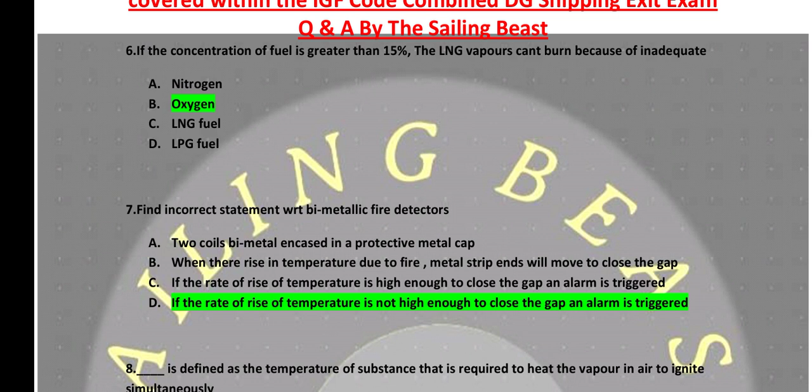Question number 5, what does the sound of an alarm signify to watchkeepers? The correct answer is D, pre-warning of abnormality. Question number 6, if the concentration of fuel is greater than 15%, the LNG vapors cannot burn because of inadequate... Answer is B, oxygen. Question number 7, find incorrect statement with respect to bimetallic fire detectors. Correct answer is D. I will repeat again: if the rate of rise of temperature is not high enough to close the gap, an alarm is triggered.

Question number 8, dash is defined as the temperature of substance that is required to heat the vapor in air to ignite simultaneously. So correct answer is C, auto ignition temperature. Question number 9, the system should have capacity to cover the indicated area with at least dash on horizontal surface and dash on vertical surface. So here the coverage area is asked, and answer is 10 liter per meter square per minute and 4 liter per meter square per minute. So 10 liter is for horizontal surface and 4 liter per meter square per minute is for vertical surface.

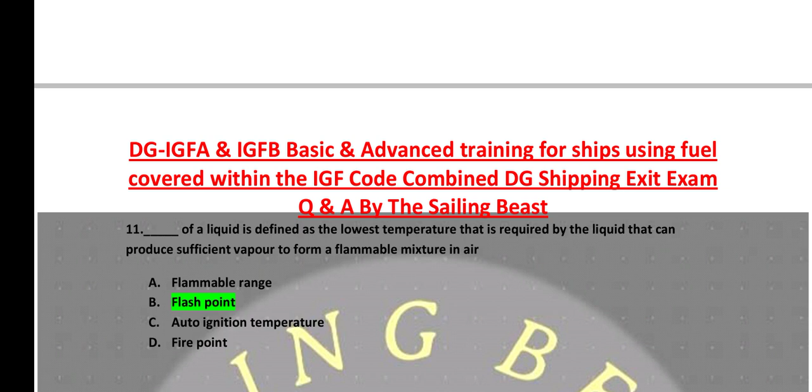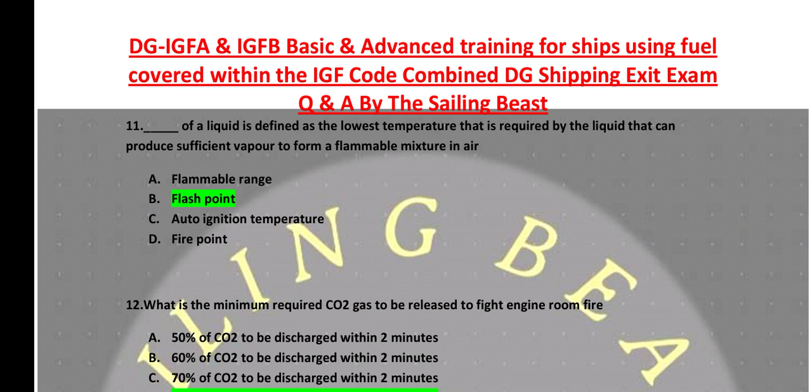Question number 10, identify the correct statement with respect to smoke detectors. So correct answer is C, photoelectric type smoke detectors are in the detecting panel of CO2 flooding system. Question number 11, dash of liquid is defined as the lowest temperature that is required by the liquid that can produce sufficient vapor to form a flammable mixture in air. So correct answer is B, flash point. Question number 12, what is the minimum required CO2 gas to be released to fight engine room fire? So correct answer is D, 85% of CO2 to be discharged within 2 minutes.

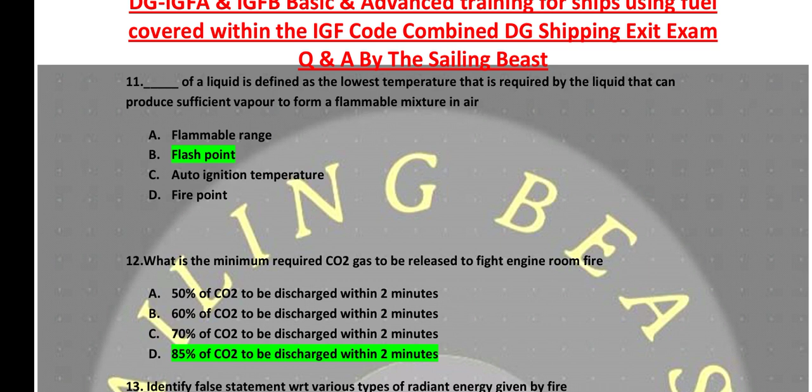Question number 13, identify false statement with respect to various types of radiant energy given by fire. So correct answer is D, ultrasonic radiation. Question number 14, gas ship surveys under IGC code shall not include. Correct answer is D, no changes to anything which falls within the additional survey is permitted without the agreement of port state.

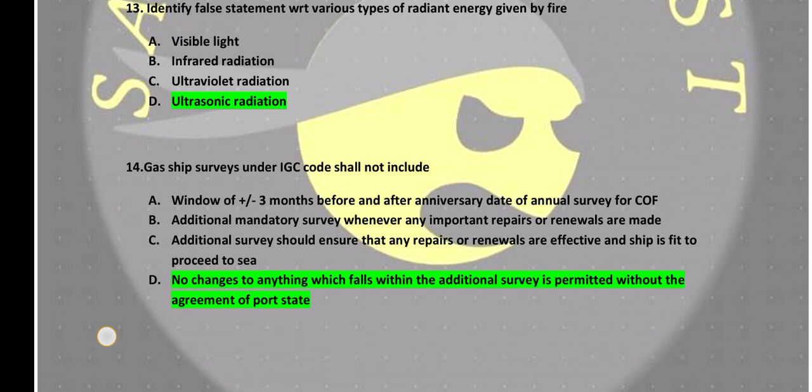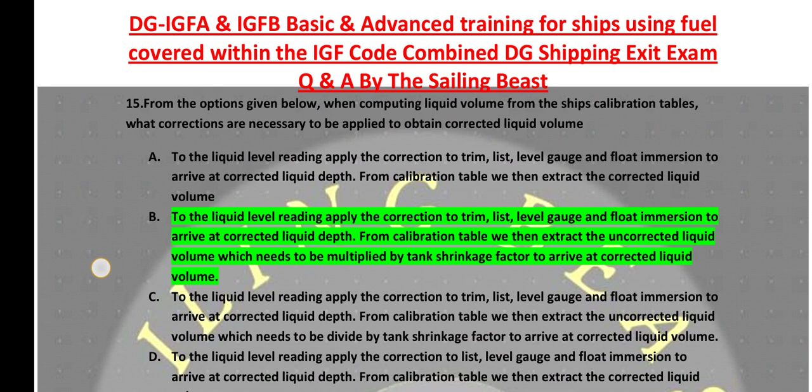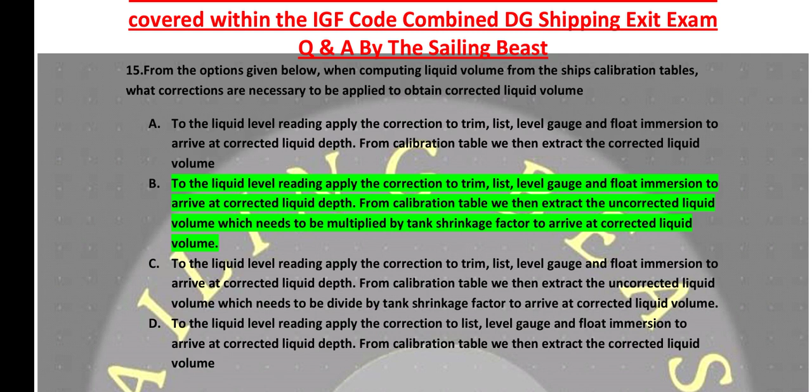Question number 15, from the options given below, when computing liquid volume from the ship's calibration tables, what corrections are necessary to be applied to obtain corrected liquid volume? So correct answer is B, to the liquid level reading apply correction to trim, list, level gauge and float immersion to arrive at corrected liquid depth. From calibration table, we then extract the uncorrected liquid volume which needs to be multiplied by tank shrinkage factor to arrive at corrected liquid volume.

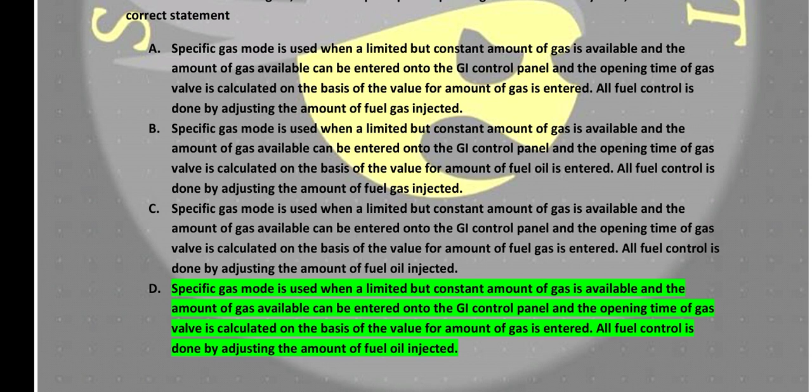Question number 16, in DFD two-stroke engine, what is the principle of specific gas mode control system? Select the correct statement. So correct answer is D, specific gas mode is used when a limited but constant amount of gas is available, and the amount of gas available can be entered onto the GI control panel, and the opening time for gas valve is calculated on the basis of the value for amount of gas entered. All fuel control is done by adjusting the amount of fuel oil injected.

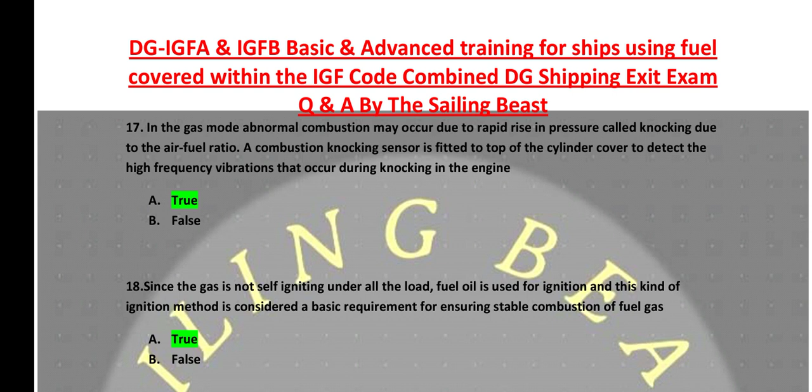Question number 17. In the gas mode, abnormal combustion may occur due to rapid rise in pressure called knocking. Due to the air-fuel ratio, a combustion knocking sensor is fitted to the top of the cylinder cover to detect the high frequency vibration that occurs during knocking in the engine. So correct answer is true.

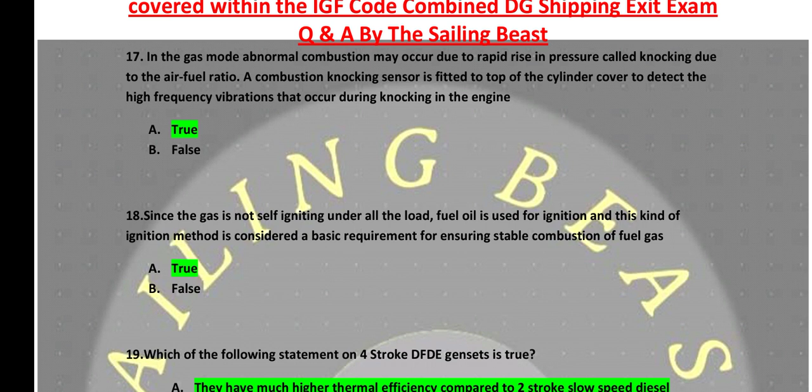Question number 18. Since the gas is not self-igniting under all loads, fuel oil is used for ignition, and this kind of ignition method is considered a basic requirement for ensuring stable combustion of fuel gas. So correct answer is A, true. Question number 19. Which of the following statements on 4-stroke DFDE gensets is true? So correct answer is A. They have much higher thermal efficiency compared to 2-stroke slow-speed diesel engine. Question number 20. The process of changing mixture in tank is called. So correct answer is A, weathering.